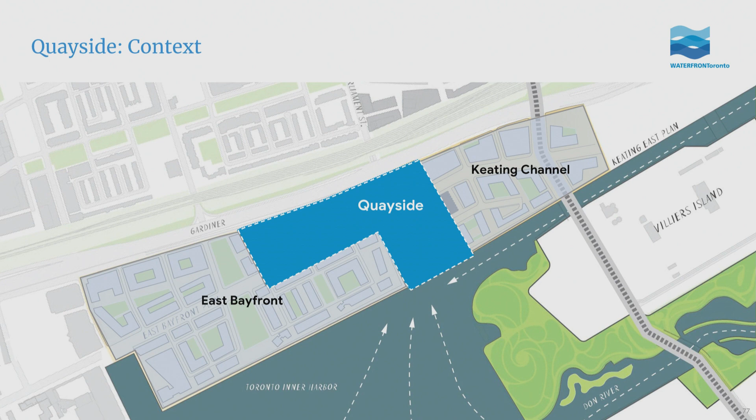So this is the Quayside context. I think people all saw that earlier in the plenary, showing Quayside between the two precinct plans of East Bayfront and Keating Channel. This is the Central Waterfront Secondary Plan.

It was approved in 2003, and it addresses 4 areas. This is meant to be a phased approach to development, something very comprehensive that works with the rest of the city. The 4 areas are a network of spectacular parks and public spaces.

It's meant to be a destination of tourism, celebration, and enjoyment. This includes reserving the water's edge for public use, public spaces at the bases of each of the north-south streets, preserving views of the lakes, and reflecting the industrial heritage and dock wall legacy.

The second one is removing barriers and creating connections, making this part of the city fabric, reconnecting the city with the waterfront and connecting the lake with the rest of the city.

Promoting a green and clean environment, sustainable modes of transportation, flood protection for the Portlands, and renaturalization of the mouth of the Don River.

And then creating dynamic and diverse new communities: places of beauty, quality, and opportunity for all, accommodating a range of development plans for people to both live and work in a neighborhood setting.

One of the precinct plans, East Bayfront, which is west of Small Street, approved in 2006, basically addresses most of the principles of the Central Waterfront Secondary Plan.

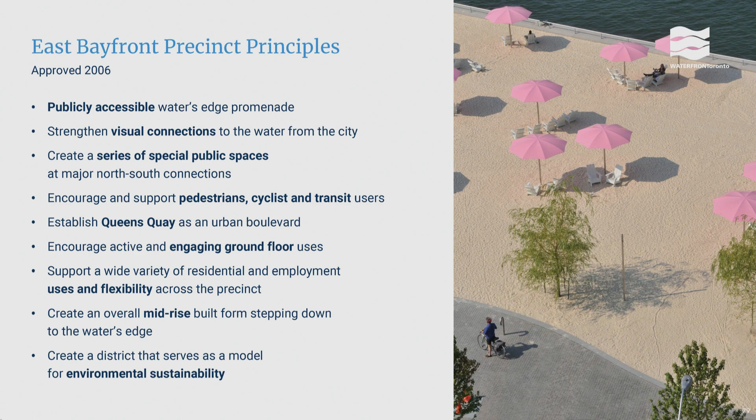Water's Edge Promenade, visual connections to the water, special places at the base of Jarvis, Sherbourne, and Parliament Street. And Parliament Street is what we're talking about today. Animated ground floors, sustainability, and a stepping down effect from the Gardiner to the lake to help preserve views.

So I'm going to turn this over to Pina now.

For those of you who were here a little earlier and heard Meg talk a little bit about our evaluation approach for the MIDP, we have been working on creating objectives based on a series of different buckets within the work that Sidewalk has been doing.

This includes improving connections to the transit network with solutions for first-last mile challenges where they may exist, and increasing the use of electric vehicles to replace carbon-emitting vehicles.

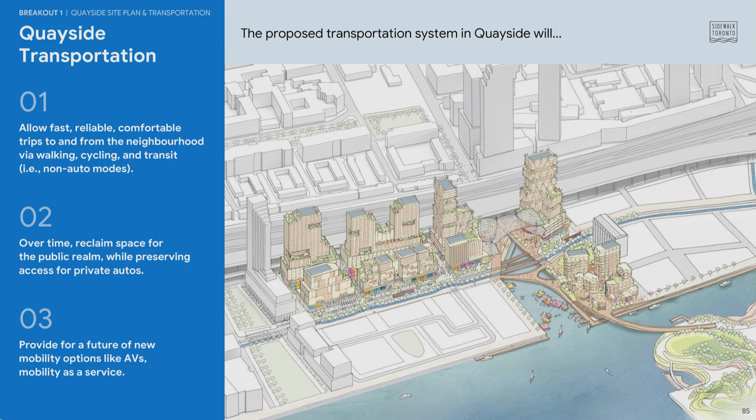And finally, while no one can be certain what the future can bring, we have some ideas about it, namely autonomous vehicles. We want to make sure that what we're building today is ready to take advantage of all the wonderful things future technology has to offer. So those are the principles, and today I'll be walking you through how they play out in practice.

Let's begin by putting Quayside in context. If you put a pin in this map at Parliament Plaza, the blue area shows how far you could reach if you were walking for no more than 15 minutes - how could you get to Quayside? The blue area shows that. This is our first line of analysis.

We want to make sure that people can walk to Quayside, and within Quayside, that walking is their primary mode of getting around. To do that, we're going to be investing heavily in a public realm and pedestrian space that is pleasant and healthy.

For instance, we're thinking about the Parliament underpass as the epitome of the sort of problem we're up against. If you ever cross the Parliament underpass beneath the rail bridge and then the Gardiner, it's a space that, in a word, is forbidding. It's dark, it's noisy, it certainly is unpleasant, and it can feel unsafe.

So goes the Parliament underpass, so goes the rest of the public realm. If we can make it lighter, more open, airier, have more art, if we can make it more pleasant, people will want to walk there - they'll want to see it. In this way, we can encourage people to walk in Quayside and to it.

Now let me superimpose the cycle district over the walking district. This is how far we anticipate you'll be able to reach Quayside if you want to take a trip of no more than 15 minutes by bike. You can reach it from this blue zone.

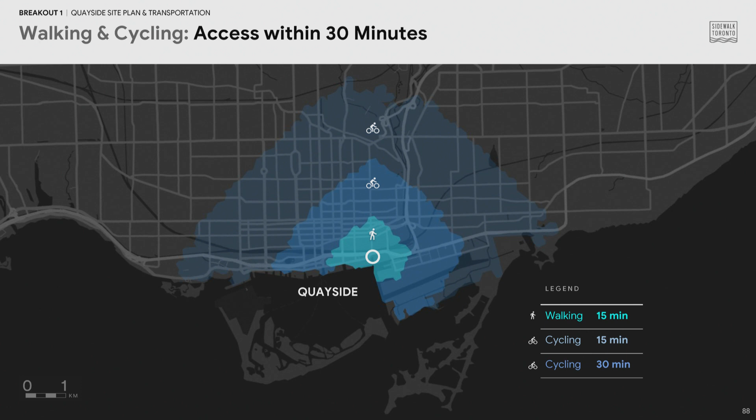So my next slide is about transit. If I used this map at this scale, I'd have to show the whole city as a blue zone, because the City of Toronto has already got an approved transit plan for the Eastern Waterfront.

And we've looked at it and said, you know what, this is something we cannot improve upon. We agree that the approved transit plan is the best plan for Quayside and the Eastern Waterfront.

So when it is built, Quayside will be connected to the transit hub of Union in the west and the forthcoming transit hub of East Harbor in the east, as well as up through Cherry to the King Street and broader streetcar network. It'll be possible with a transfer or two to reach Quayside with a TTC fare from anywhere in the city, which we're very excited about.

So all we need to do is work with our partners to find ways to accelerate delivery of that approved transit plan. The transit itself doesn't need innovation -- all that needs innovation is a way to get it to happen faster.

Let's drill down into these principles some more. This is Quayside at a pedestrian scale. The map is a little hard to read at this scale, but you can see we've worked out the distances it would take to walk from point to point within Quayside, and they're quite short. We want pedestrian travel to be your first choice when traveling within Quayside.

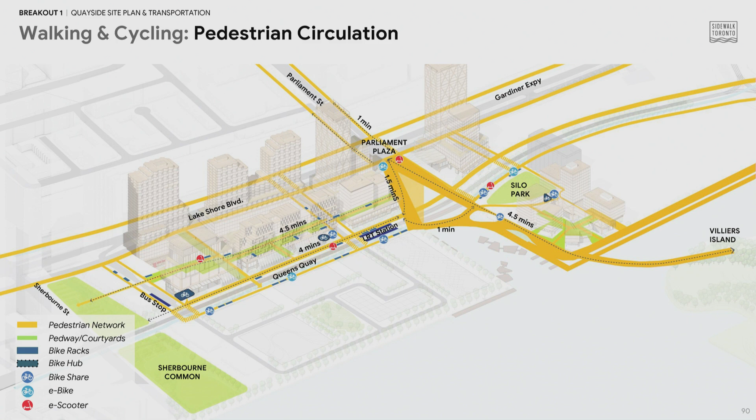Not necessarily your only choice though -- as you can see on this diagram, we've got bike share, scooter share, and e-bike share. There are lots of opportunities here for you to transfer to other modes that can improve your range and let you travel farther as part of the trip.

The bike network: the Martin Goodman Trail already runs along Queen's Quay. In the future, we anticipate it will go right across Parliament Slip all the way over to Cherry, complementing the existing city plan for a multi-use trail along Lakeshore.

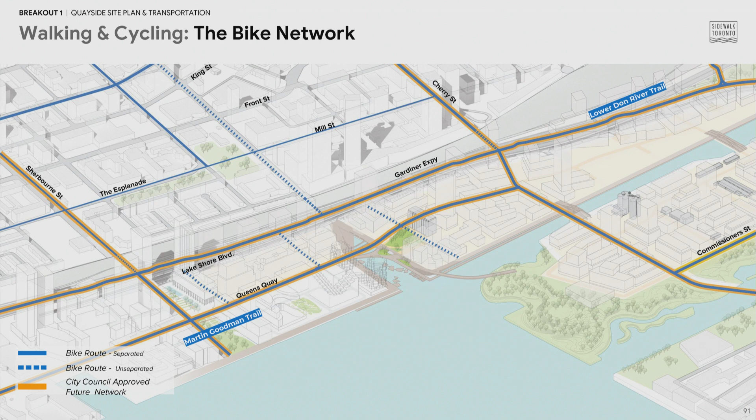That's two dedicated high-speed lanes for cyclists running east-west along Quayside, combined with north-south links at Sherbourne and Cherry. For cyclists willing to move at pedestrian speed, there'll also be north-south connections at Bonnycastle and Small and at Trinity. So there'll be lots of ways to move around within the site by bike.

Once you arrive, you'll be able to park your bike at ample bike parking facilities, whether that's bike racks on the street or the bike hubs at our interchange. We'll have a barge out in Parliament Slip just for bike parking -- an innovation we saw in Amsterdam and want to bring to the city.

We'll have an interchange where it says bike hub, beneath sites 1 and 2, which will also be for cars. When you come to Quayside by car, we anticipate you'll drive in via Bonnycastle, drive below grade, park your car, and then move into other modes, whether that's LRT right at the corner, bike share, or the bike hub.

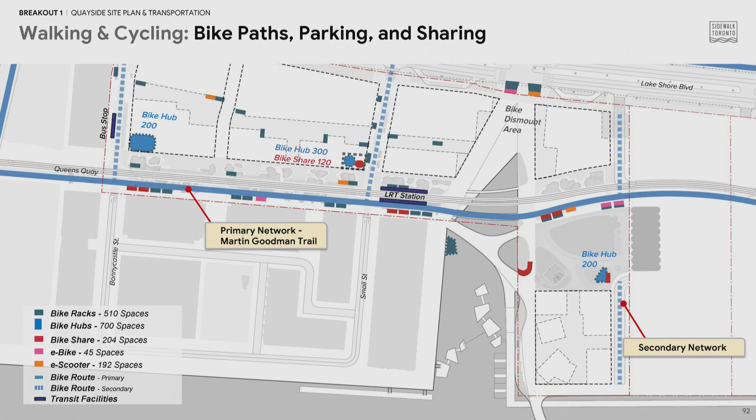And that bike park, the parking at the interchange, will have facilities to charge your electric vehicles. So we'll have all sorts of seamless multimodal transportation accommodated through that interchange. We're quite proud of it.

If the approved plan is built, this is our vision of what it would look like. You'll have traffic and the streetcar running along Queens Quay from Union Station all the way across Parliament Slip to Cherry. Some streetcars will be able to go north through what is now the Distillery Loop up into King Street.

You'll also be able to go south down Cherry to Commissioners and beyond to East Bayfront. Sharp-eyed TTC fans will note that you cannot see the 72 PAPE bus on this map. That's because we think it's redundant to the LRT, so the TTC won't run it, although the TTC will continue to run the 65 bus south through the site.

But I must emphasize that we don't plan to own, operate, or privatize any transit in the site. It's all going to be in the TTC's hands, meaning it's up to the TTC to dictate and determine its own service patterns. We don't presume we know better than they do how to do that. So this is just our vision of what the TTC service pattern in the site might be.

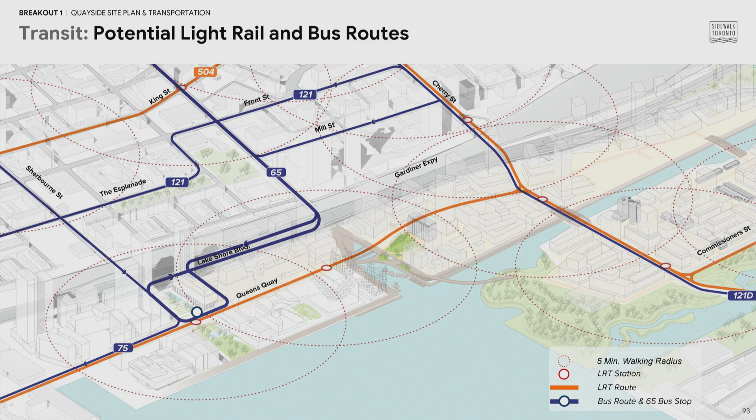What does this feel like on the ground? This is Queens Quay in 2025. The right-hand side of this image is the south. You can see ample pedestrian space, mirrored by ample pedestrian space on the other side of the street. To the north of that, we've got the Martin Goodman Trail, expanded by 1.4 meters to a full 5 meters across to make it more comfortable and convenient for cyclists. Not pictured, but under the ground, is our heating system to keep it ice-free.

Then we've got the streetcar slash LRT running in its own designated right-of-way. North of that, we have Queens Quay for automobiles, the traditional street. You'll note we only have a single lane - we've removed one lane from automobiles so that other space can be given to other purposes. So cars along Queens Quay will run westbound only, one-way. North of the westbound travel lane is our dynamic curb.

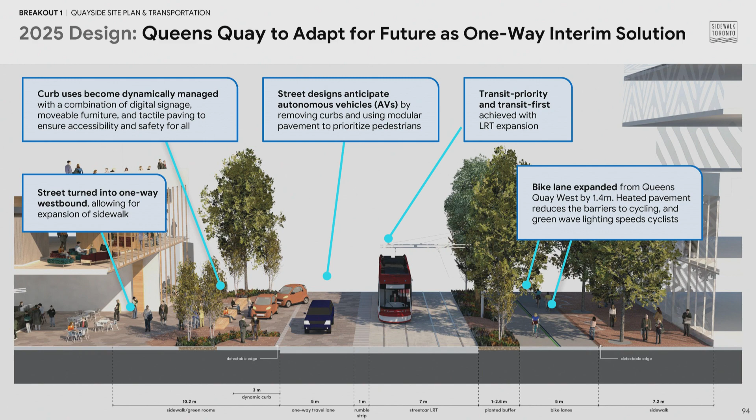What is that, I hear you ask? Well, in the past we've designated what usage the street is to have by hard coding it in infrastructure, through concrete and curbs. Technology means we have new options available to us now. We can embed within the street itself lights and devices to show what the purpose of the street is. So to the left, you see dynamic curbs.

A car can drive in, pause, pick up or drop off passengers, and then move on. That's appropriate during periods of peak use. But during periods of non-peak use, what we have on the right is, with changing the light pattern on the ground and rearranging the mobile street furniture, we can quickly and easily reclaim space that was formerly for cars and turn it into space for the public.

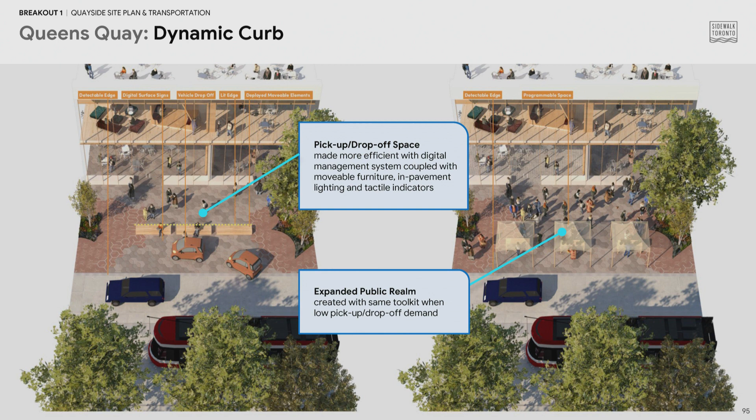Whether that's pop-up kiosks, street furniture, or street art, the only limit is what the neighborhood wants to make of it. We'll be able to fluidly rearrange the use of the space on the street, giving it to cars when necessary, but not otherwise.

So how do cars get around the site? If you're coming from the west, little has changed. Some cars will continue just past the site via Lakeshore, which is the primary artery. Others will turn at Bonnycastle and enter the interchange I described earlier, where they can park their car for the day, arrange for off-site transport for long-term parking, and then switch modes to transit, pedestrian use, or bike share.

If you're coming from the north or the east, things are slightly different. Unfortunately, it's not possible for that traffic to turn left at Small to get to Queens Quay, because it's simply not safe to have a left-hand turn at Small so close to the intersection at Parliament. So people coming from those directions will have to take a route that's circuitous, but only slightly so - they'll proceed perhaps another 100 to 150 meters to Bonnycastle, at which point they can loop backwards around onto Lakeshore, or use Bonnycastle to enter the interchange and the site.

Now you may be wondering, Andrew, why does it say 2025 up there?

The answer is because in 2025, we expect that legacy vehicles will still be the norm, but in the future we will have autonomous vehicles. So, legacy versus autonomous vehicles.

Very simply, a legacy vehicle is what we're all most familiar with, and the most salient feature is a human is driving that car. An autonomous vehicle, a computer is driving that car, which has many benefits, but the one I want to highlight is that the robot driving that car will always obey the rules of the road. It will always obey the speed limit. It cannot but do these things. And whatever else that means, everyone sharing the road with that car is much safer, particularly the most vulnerable road users, pedestrians and cyclists.

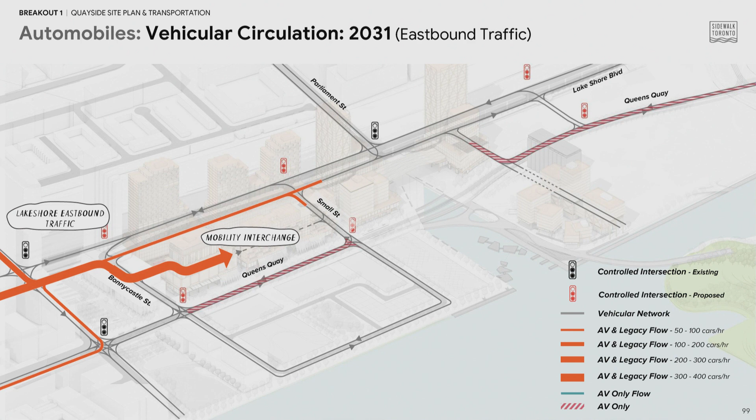We think autonomous vehicles are going to be a step change in urban mobility, not just for drivers, but for everyone else. So in 2031, we are taking the step of designating some streets to anticipate that they will be AV-only. That's true eastbound, southbound, and westbound. It's a change we're very excited about.

Now, everything I've said so far has been premised on the idea that there's no connection between Parliament and Queens Quay, and that if you're coming on Queens Quay, there's no connection across the slip. That is Sidewalk's proposal, but it's not the only proposal.

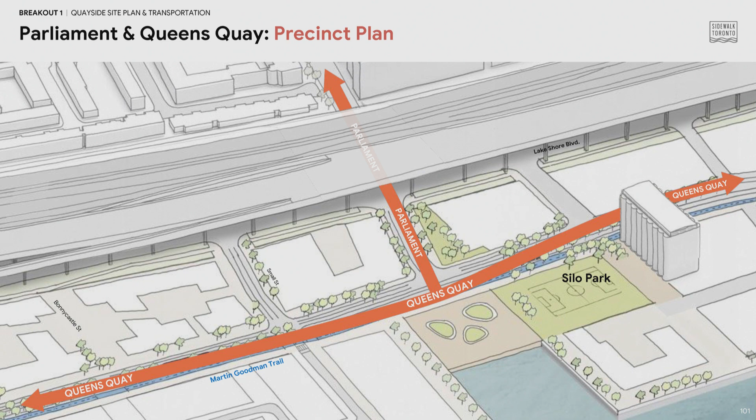The existing precinct plan looks like this. There is a road connection at Queens Quay, and there's one at Parliament. So we've got the Sidewalk vision on one side, we've got the city's approved vision on the other. In between, there's all sorts of possibilities.

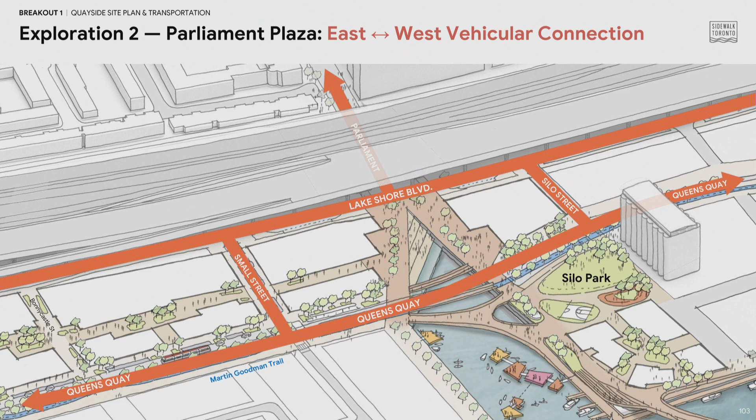So this is our vision. You could change it. You could have the Queens Quay connection but no Parliament connection, the Parliament connection but no Queens Quay connection, or a Parliament and a Queens Quay connection while preserving Parliament Plaza as much as possible as a public space.

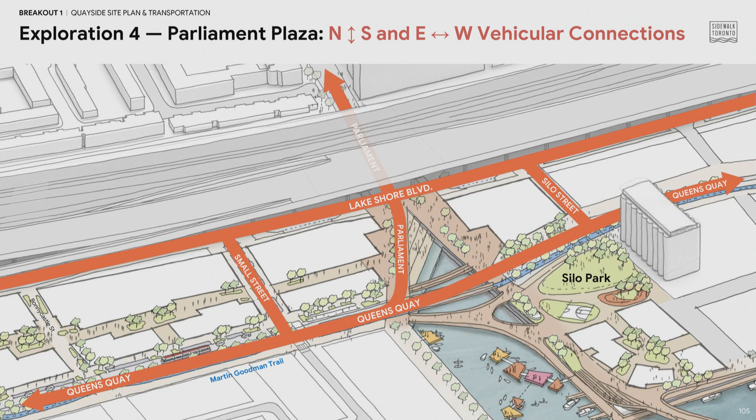We have our ideas, the city has their ideas, and we are having a fruitful conversation that's going to be continuing over the coming weeks for how to determine the best way to serve the most users. It's a conversation we're looking forward to.

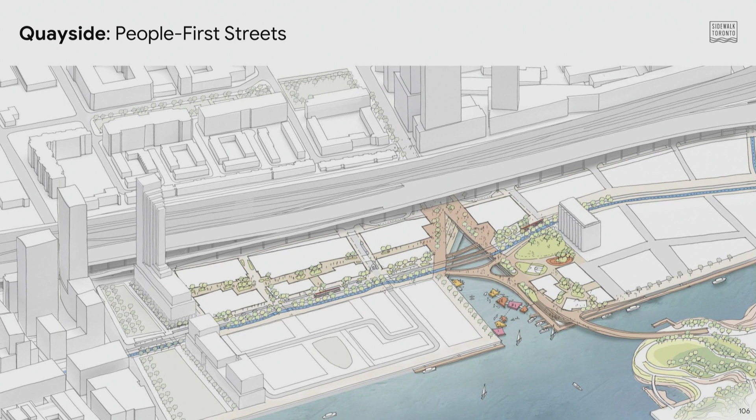To wrap things up, our goal, first and foremost, has been to make sure that the mobility network, the streets that we have, are not streets for cars, they're not streets for cyclists, they're not even streets for pedestrians—they're streets for people. They're streets for all modes and for easy transfer between those modes. That was one thing we aimed to do.

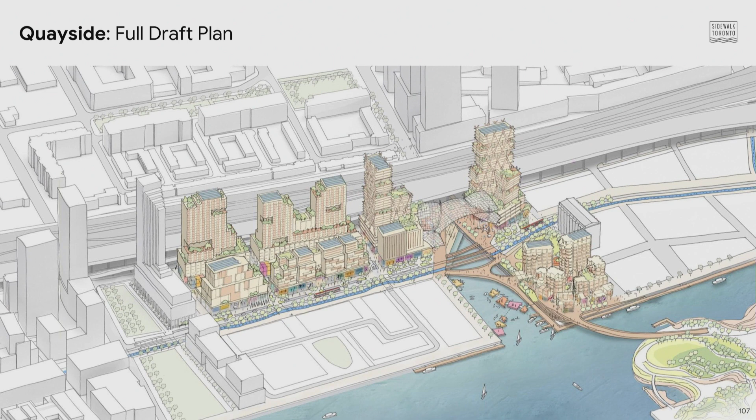The other is to make sure that the mobility network is pleasant enough and comfortable enough that people aren't just traveling to get from A to B. The mobility network is a place where people want to be in its own right because it's just that pleasant and exciting. So I hope you will agree that's a promise we are delivering on. With that, I'll thank you for your time and take your questions.